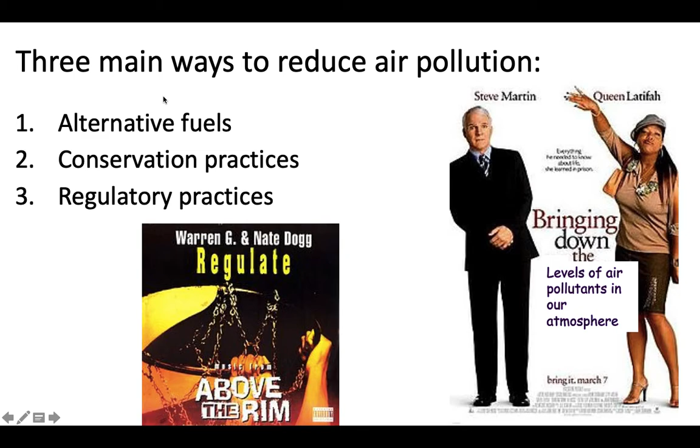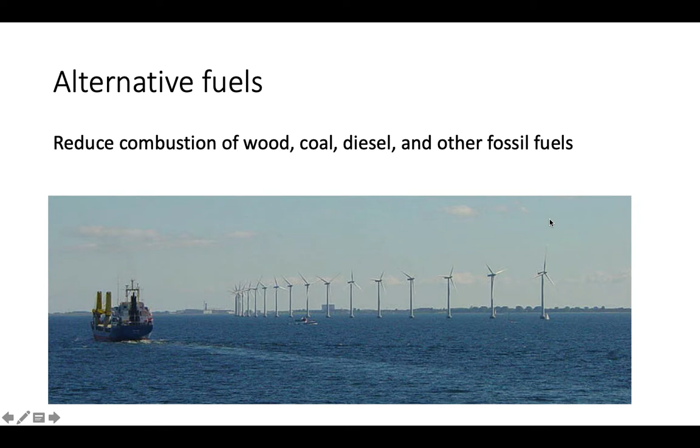So alternative fuels: if we reduce our reliance on fuels that produce air pollutants, that's going to reduce the amount of air pollutants. For example, wood and coal produce a lot of particulate matter. Coal also produces a lot of sulfur dioxide and nitrous oxide when you burn it. If we can move away from coal, even towards natural gas, which burns a lot cleaner, that's going to reduce air pollution. Will it reduce CO2 emissions? Not as much, but it will reduce air pollutants like NOx and SO2. That also goes for diesel and other fossil fuels. So moving towards alternative fuel sources, whether it's electric cars or renewable energy or solar panels, what have you.

You can also change your behaviors and change the culture and society to be more conservation minded when thinking about the way we use these fuels. For example, don't drive your car as much, walk more, or take public transport, or carpool, right? Get more bang for your buck when you're using fuel, so that way if you were taking two of your friends to school with you, then that's two cars that are no longer on the road, that are no longer producing air pollutants.

Another big thing that you can do is educate one another about the way that you consume fuel, for example, idling your cars. Tell your friends about why idling cars is so dangerous, and then if they're waiting in the pickup zone to pick up their friend, just shut the car off and wait. It'll be much better that way in terms of air pollution.

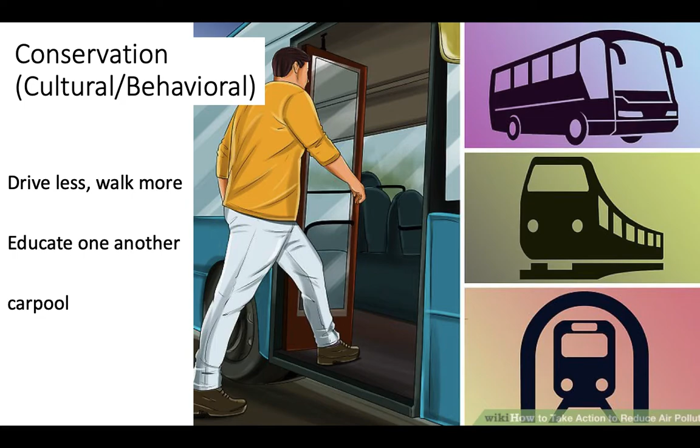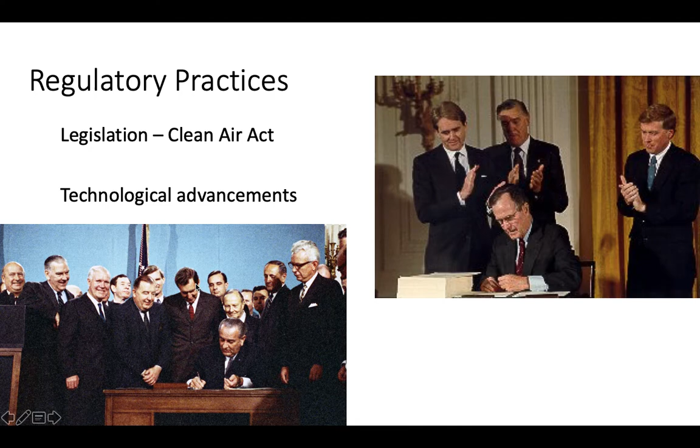The big one, though, are regulatory practices, and these are the ones I want to spend a little bit more time on. In terms of legislation, we've been talking about the Clean Air Act all year, but a lot in this unit. Here are some cool photos. This is the initial signing of the Clean Air Act by President Lyndon Johnson, and this is a 1990 amendment to the Clean Air Act being signed. We've been talking about that, so you should be pretty familiar with the cap and trade and removing lead from gasoline, things like that. But I now want to spend some more time talking about the technological advancements that help us regulate the air pollution we produce.

One of the most common is something called a catalytic converter, which was developed in the mid-70s and is in your car now if you have a modern-day car. And it's extremely important. It takes pollutants from the combustion reaction like carbon monoxide, nitrogen oxides, and hydrocarbons, or VOCs, and it traps them and chemically transforms them into much less harmful gases like nitrogen, carbon dioxide, and water. Is carbon dioxide great? No, but it's certainly less toxic to breathe than these, and it doesn't contribute towards smog formation. So catalytic converters are really, really important.

They have this honeycomb type mesh in the center that is lined with some precious metals like palladium and rhodium, which makes them a little bit expensive.

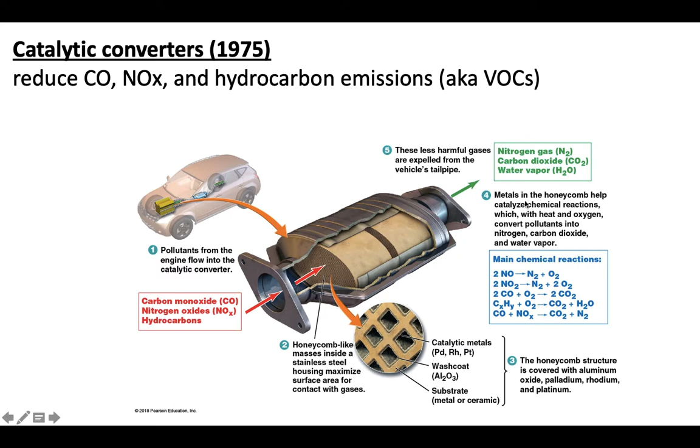But as these gases travel through this honeycomb, they interact with these precious metals and do all sorts of crazy chemical reactions to produce less harmful gases. Here's a picture of what it looks like in your car. They're a little bit different in every car, but the honeycomb thing is inside of there.

At gas stations, they have these things called vapor recovery nozzles. As far as I know, they're at every single gas station, so you probably just think of it as a gas station nozzle. But it has these little slots or holes in the tip that prevent gas fumes from escaping as much as they did before these were developed. So they help reduce the amount of VOCs that are emitted at the gas pump, but also reduce the chance of explosion due to leakages.

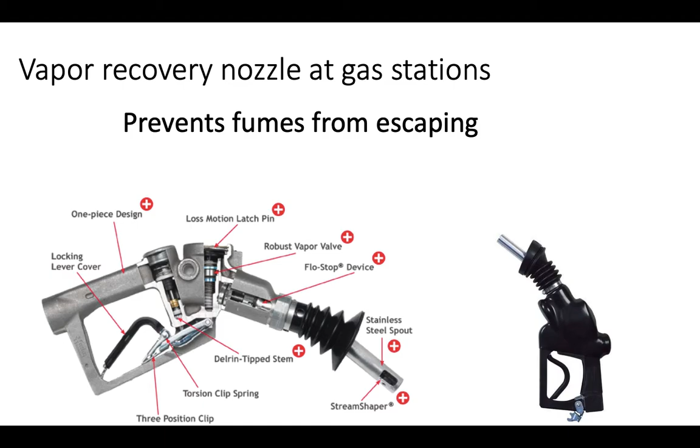Other developments: I'm gonna zoom in on coal plants because they produce a lot of the harmful air pollutants that we've been talking about, mainly sulfur dioxide and particulate matter, and thanks to the Clean Air Act's restrictions, they have been forced to develop regulatory technology to reduce those air pollutants.

I want to focus first on sulfur dioxide. They do a process called desulfurization, which is pretty simple and pretty self-explanatory. They desulfurize their emissions, reduce the amount of sulfur dioxide in it, which is going to have beneficial impacts on acid rain formation. And they do that using a couple different technologies: scrubbers and fluidized bed combustion, which I've already mentioned. I'll review them one more time because they might be a little bit complicated the first time you see them.

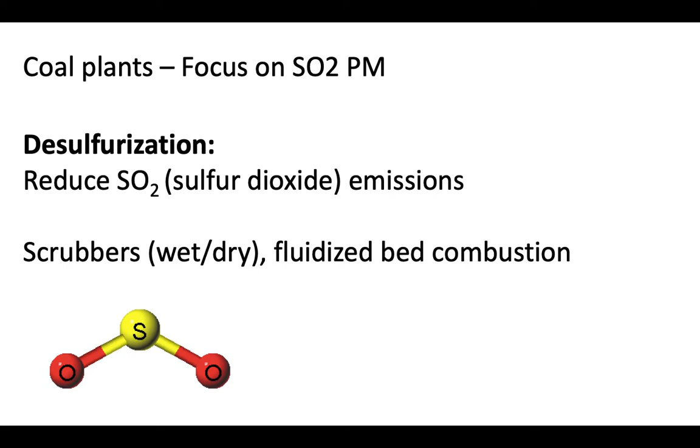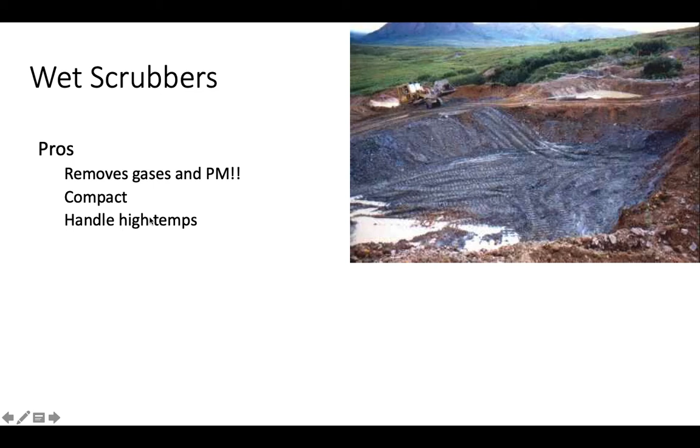Briefly speaking, the pros are that wet scrubbers remove gases. They also remove particulate matter. They're very compact, and they can handle really high temperatures. They're used all over the place. The cons, however, are that they can corrode, they're expensive, and the big one is that this waste fluid that is produced needs to go somewhere.

And if they can't repurpose it, if they can't recycle it or treat it, they just dump it into these pools or settling basins, and the coal ash and the SO2 that has been trapped in there can lead to the buildup of toxic substances such as heavy metals. Just to clarify, because I might have misspoken there, the SO2 itself is not a heavy metal, but the coal has heavy metals in it, and when those come through in the gas, those are also stripped out and end up in this liquid here.

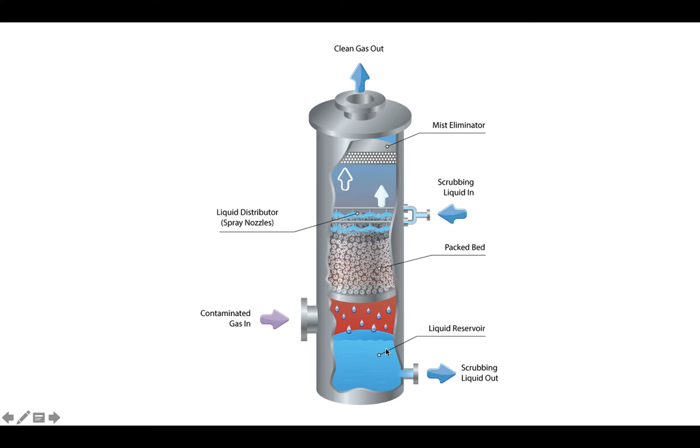Heavy metals like mercury, arsenic, cadmium, lead, and so those things can build up in these basins over time, and if an ecosystem is exposed to toxic heavy metals, that's going to be very detrimental to their health.

On the flip side are dry scrubbers. Not that different. It's pretty self-explanatory. Instead of using a scrubbing liquid, they use a scrubbing sort of powder. So that's why it's called dry, because there's no liquid involved. It's more common than wet scrubbers because it's a little bit cheaper.

It's a little less effective, but it doesn't use a scrubbing liquid, which means that it doesn't produce that scrubbing liquid waste. It does produce a residual powder, which is still dangerous, but there's a lot less of it, and it's a lot easier to dispose of. So that's it for scrubbers.

The next one I mentioned before is fluidized bed combustion. Again, they're combusting coal. They're doing two things. One, they're combusting coal in the presence of pure oxygen, which increases the efficiency of the combustion reaction, which means that the pollutants produced are more concentrated and easier to trap.

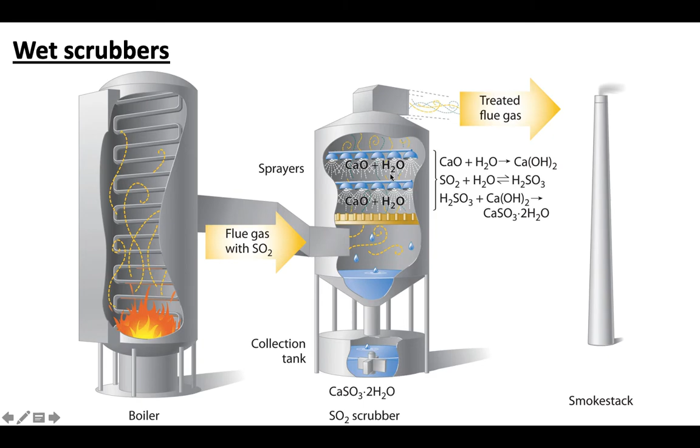But it also burns coal in the presence of limestone or calcium carbonate. Limestone, we've talked about before, except we just called it lime, and that can be used in your soil to reduce the acidity. And it's very similar to the chemicals that are used in the scrubbing solution in the wet scrubber. This is very similar to limestone.

So by burning the coal with the limestone or the calcium carbonate, that's going to extract the SO2 at a very concentrated rate, so the gas that is released is much cleaner. So that's great. The basics of what you need to know is that wet scrubbers, dry scrubbers, and fluidized bed combustion remove SO2 from the exhaust gas. They can also remove particulate matter, but mostly SO2.

But Mr. P, how do they remove their particulate matter?

Great question, Dora. It's so good to see you wearing protective gear again. If you don't appreciate this joke, I just want you to know it took me a long time to find an image of her in science-related clothing, and then I had to crop this all out, so please appreciate me a little bit more. I'm trying here.

All right, I mentioned that these technologies can remove particulate matter, but mostly they focus on sulfur dioxide. So how do they remove particulate matter? They can use a couple of different approaches. One is something called electrostatic precipitators. You don't really need to know how it works too much.

All you need to know really is that it uses a static charge, much like if you rub your feet on the rug and then touch something metal, you'll get a static shock. It uses that same phenomenon to trap particulate matter like dust and smoke and ash and collect them underneath. That's it. They collect particulate matter.

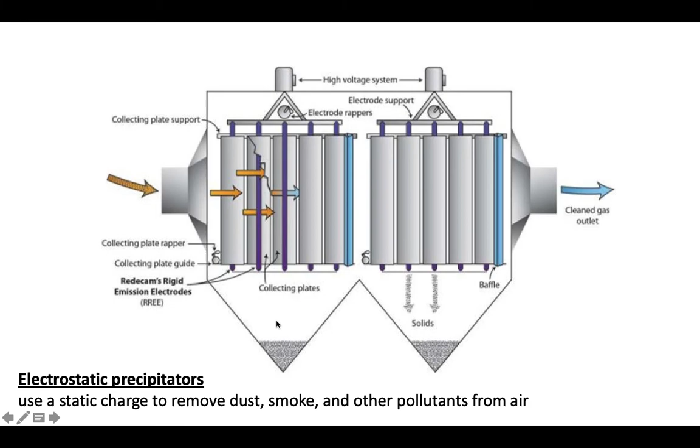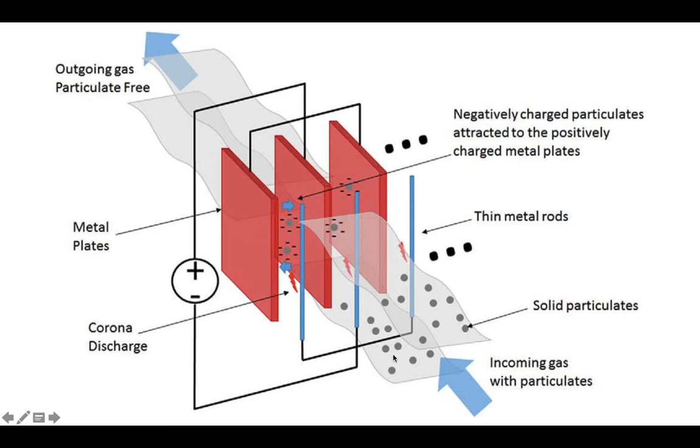And here's another image showing the electrical charge used to extract solid particulates from the gas as they move through this electrical, what's the term? Electrical gradient, I suppose? Yeah, sure. Let's go with that. And the last one are something called baghouse filters.

No, it's not this, although it is very hilarious, and I know you're laughing your butts off right now watching this video, so thanks. God, I try so hard.

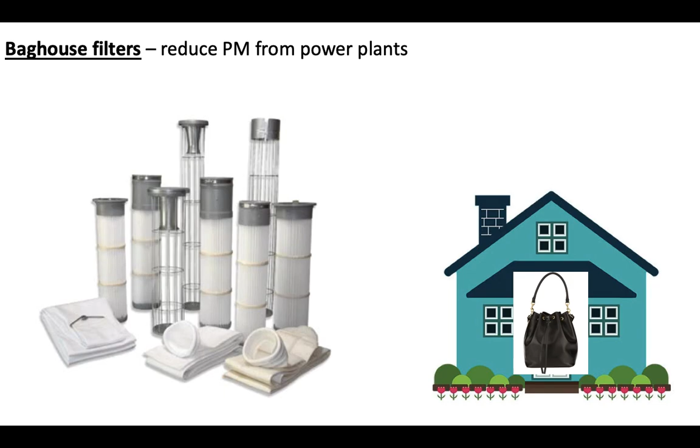Baghouse filters are just like really high quality filters that coal power plants use to extract nearly 100% of all particulate matter from their exhaust. So these technological advancements, both the electrostatic precipitators and the baghouse filters, do a great job at removing particulate matter from coal power plant exhaust. Meanwhile, if you want to remove some SO2, you have to use something like fluidized bed combustion, dry scrubbers, or wet scrubbers. And that's it.